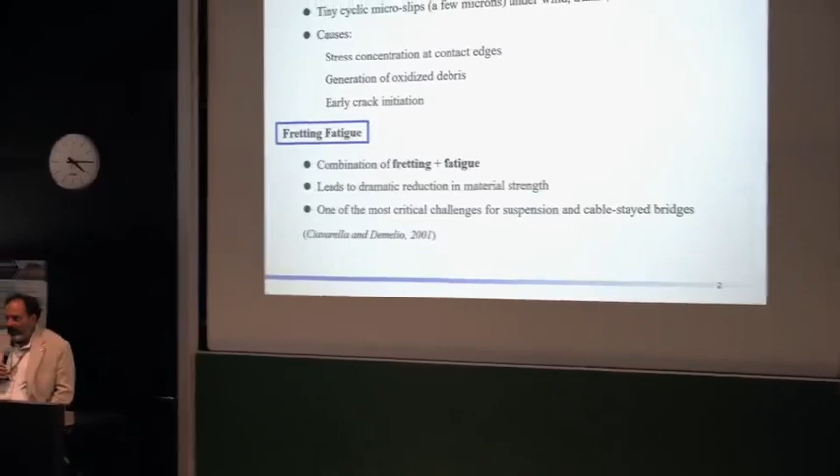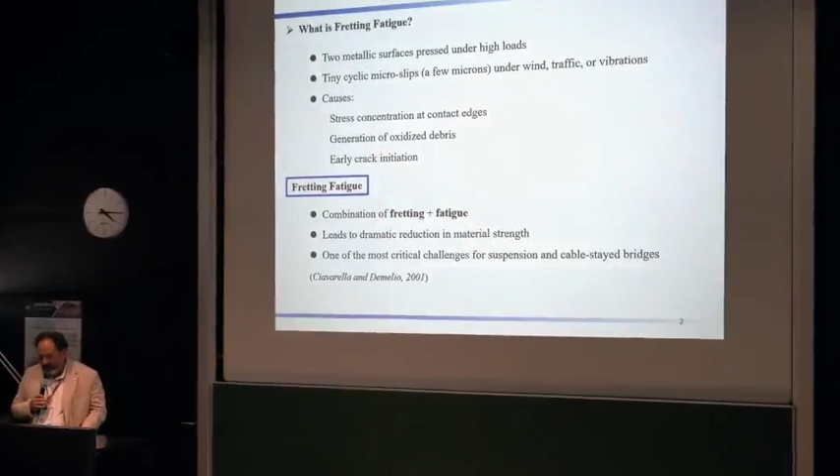I'm not an expert in everything, so I'm only looking at the possible effect of fretting fatigue in the cables, between the cables and where they lie on top of the towers. Fretting fatigue is a special type of fatigue when two surfaces are pressed together under high loads, causing micro slips that lead to stress concentration, debris, and a faster initiation of cracks. So it's a combination of fretting and fatigue.

This topic has never been understood very well. It was the topic of my PhD in Oxford, where they have studied this since the 1960s, and I can tell you that the topic is still not understood. It leads to a dramatic reduction in metal strength, and it's one of the most critical challenges in suspension bridges.

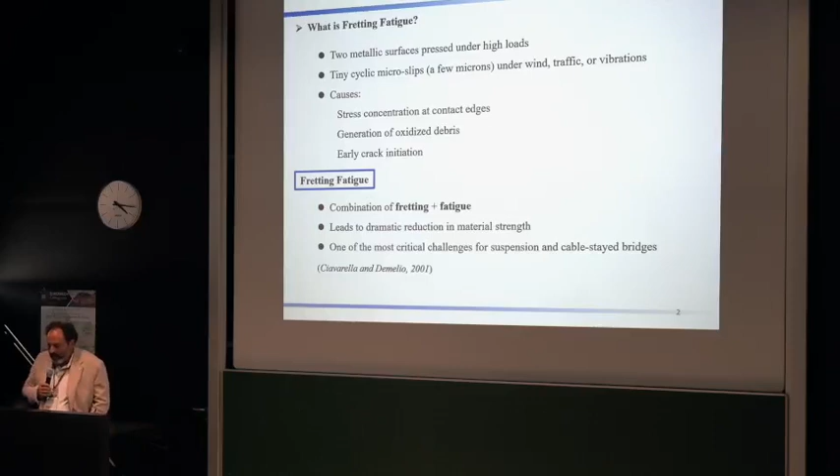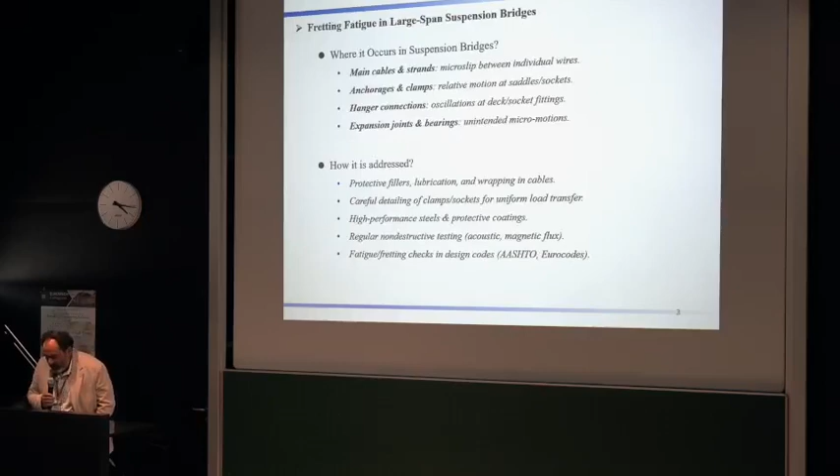So where exactly it occurs in bridges is in the cables, in the strands, but also in the anchorages and in the connections, in the joints. How you can address this, to go straight to the point.

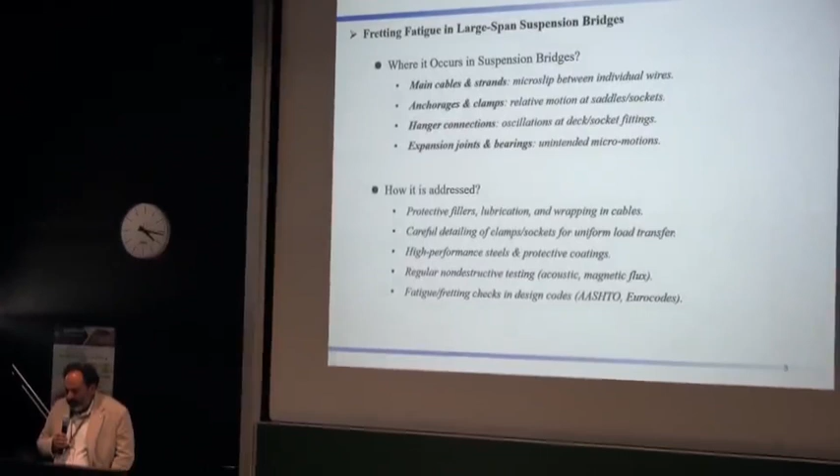You can do protective fillers, lubrication, wrapping in the cables. You can try some tricks for more uniform load transfer. You can do protective coatings, and you can do regular non-destructive testing to check that nothing is going wrong. Of course, you can also design somehow.

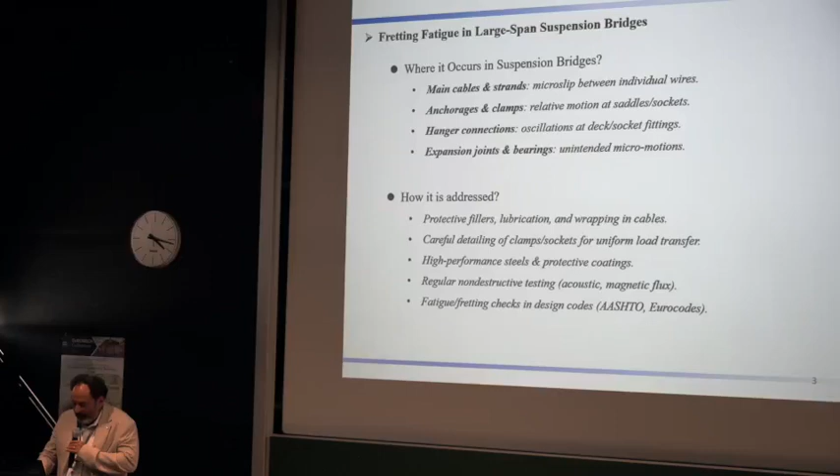You can use codes, and now this is more delicate and difficult to explain. So this was a topic of interest in any bridge.

One of the main and biggest improvements in understanding fretting fatigue was the MIT crack analog, suggested by Giannakopoulos and Suresh. Around the same time as my PhD, they were working with the US Air Force on fretting fatigue together with Rob Ritchie, Tom Farris, and other people in the US. They suggested a very simple model, proposing that the contact, apart from details of the geometry and apart from the micro slip, is not very far from a crack.

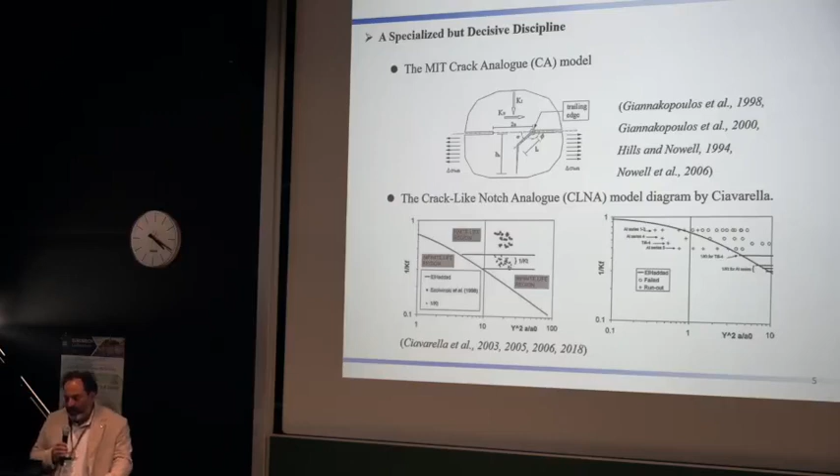Here you can see some diagrams where I collapsed all the known data of fretting fatigue. There is, of course, one fitting parameter in this model, which is a ratio depending on fatigue threshold and fatigue limit - of the order of intrinsic cracks in fatigue.

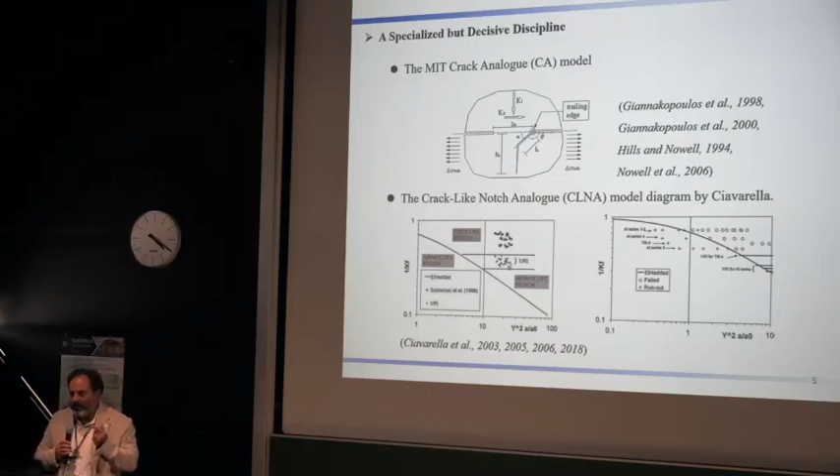So it's of the order for metals of 100 microns. But except for this parameter, which is reasonable because we can estimate it from fatigue experiments, the model fits all the data quite well for infinite life.

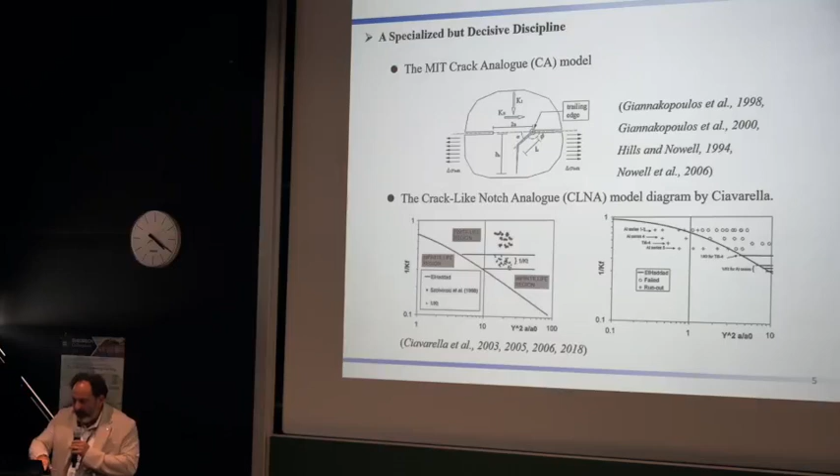So in design, we can apply many different types of approaches. One is to apply knockdown factors, to consider that fretting fatigue is more serious than fatigue, but we should also consider that there are scale effects.

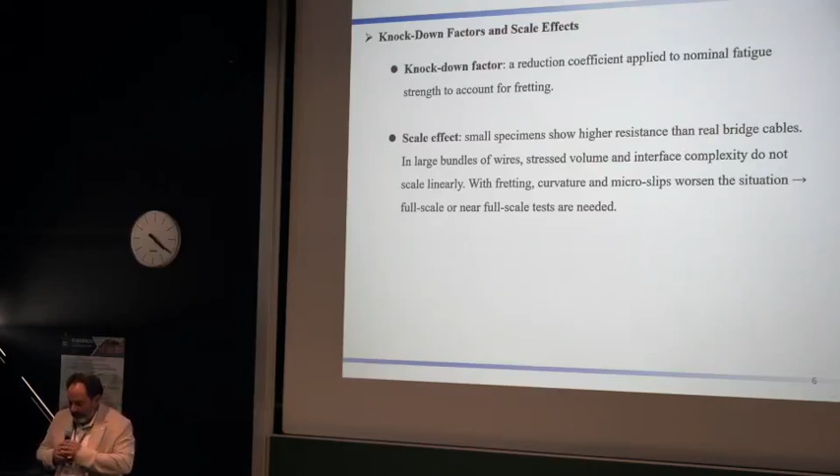I spoke to Professor Bazant, and he told me that in the case of wires, we should have better behavior for bigger wires than for smaller wires. This is very interesting to me because normally the opposite is true - for bigger specimens, you have weaker strength. So I will be interested to ask him his opinion, which of course I believe.

And so in general, in the past, we didn't always design with codes. If we think of the Roman Pantheon in Rome, you know very well that it has survived 2,000 years, and it was never designed. There was no stress analysis, no Cauchy, no Navier, no bending theory. The Romans didn't have any model.

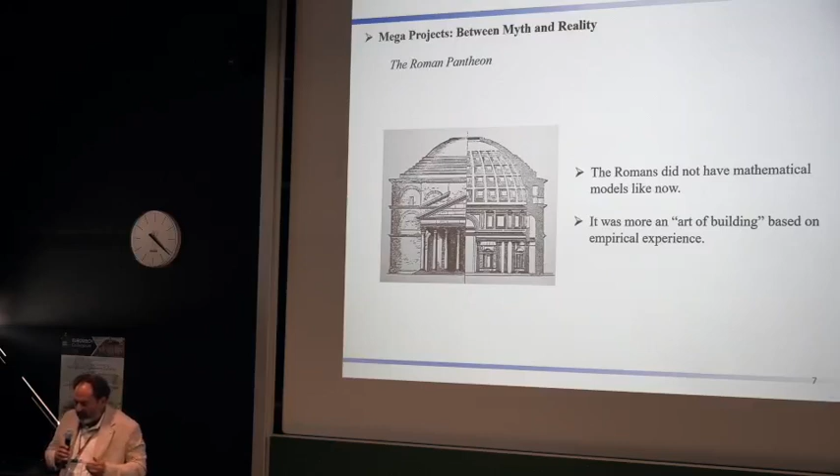They had some empirical understanding of cement, which is very interesting, and it is still not understood exactly how they built the structure. If you have better ideas, maybe we can discuss.

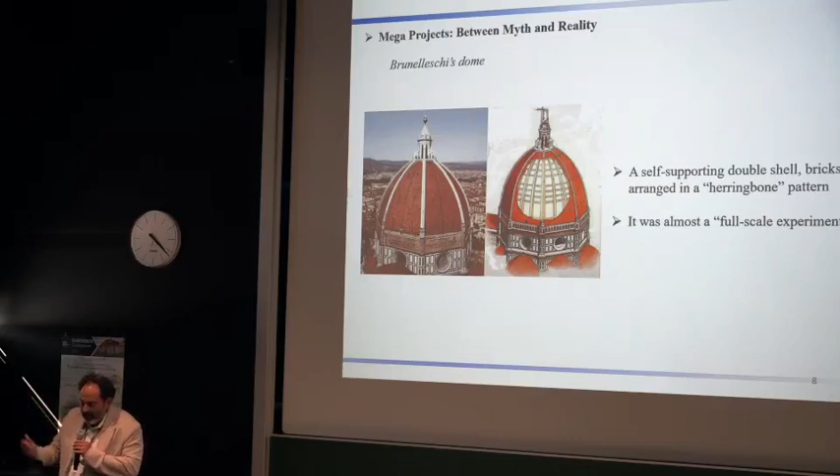There is the Brunelleschi dome, also a very huge progress. Again, there was no real calculation, but it was Brunelleschi who understood how to build the dome in a certain herringbone pattern, and the dome is still there in Florence. So this is the monument of the Renaissance, like the Pantheon is the monument of the Roman Empire.

There is the Eiffel Tower, moving a little bit further, and this is a monument of calculation, because Eiffel was a very brave engineer and he applied almost modern methods. There was some controversy, mostly about the aesthetical value of the tower. Maupassant and Flaubert were not very happy about the tower, but if you have been to Paris, you probably know that the tower is still there.

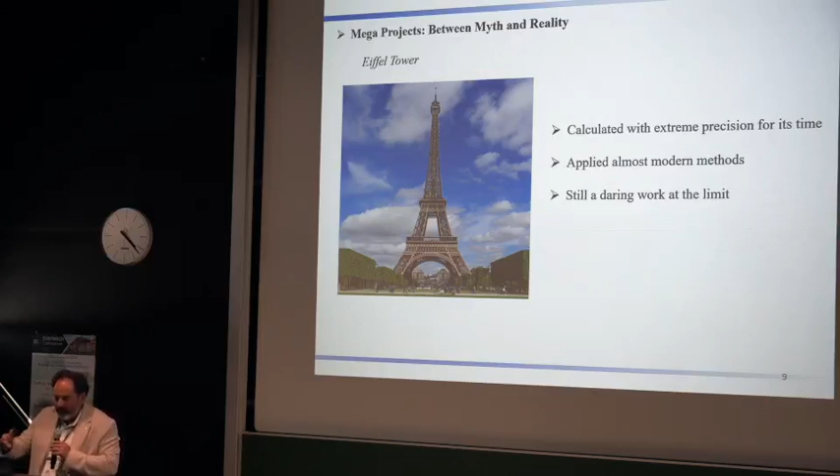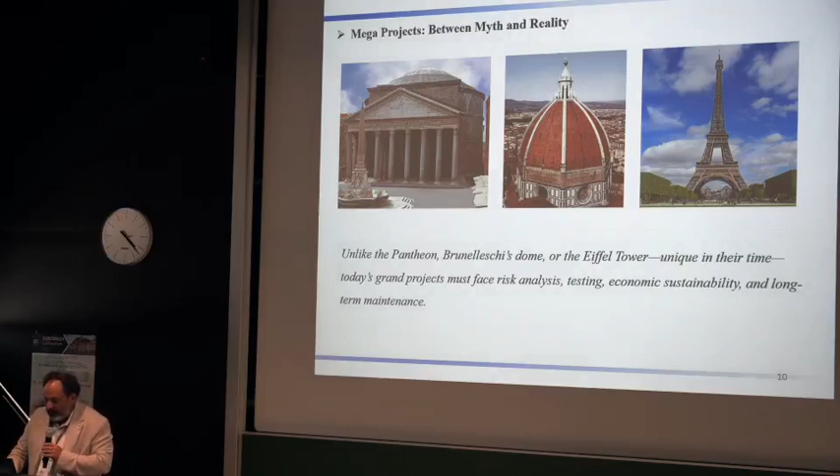So these three examples mean that not necessarily do we need to design structures in advance, and not necessarily do we understand in advance how long the structure will last.

But the Messina Strait crossing, as I said, was proposed many times since ancient Rome, and it was never built. I don't want to go into details of the proposals. It is a 3,300 meter bridge in an area where there is a possibility of earthquakes, movement of the plates, and strong wind. So it's a real big challenge.

People have studied this problem for more than 30 years, and there was a lot of funding, especially in Italy. I don't know why, but this funding is only concentrated in Italy, and they addressed many problems. I don't want to say that they didn't care about fatigue.

Now there is a discussion, of course, in the newspapers. There are many contributions from engineers, from geotechnics, and not everybody is convinced that the bridge can be built. They also changed the structure, the solution.

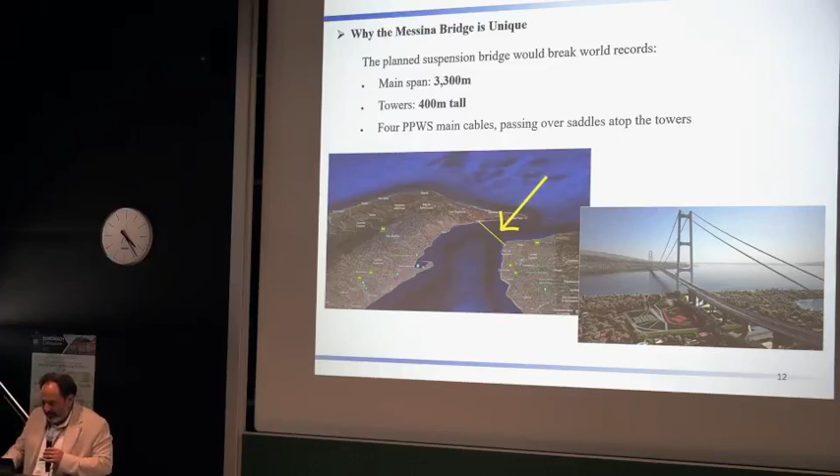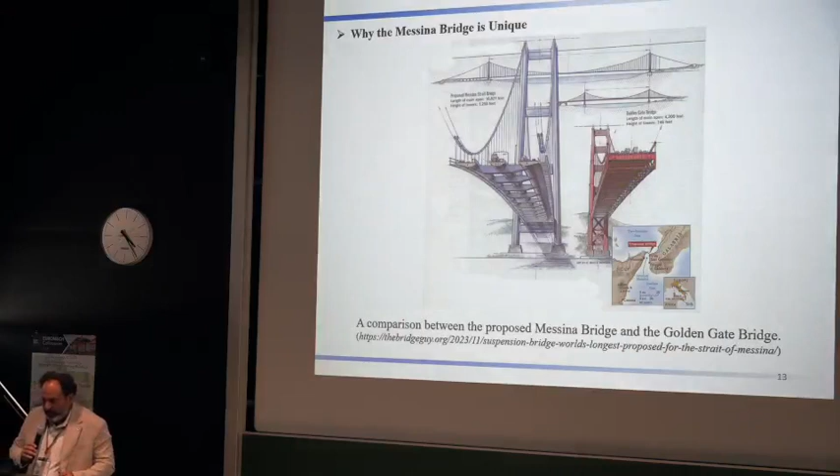Now there are 4 main cables passing over these saddles, and the towers are 400 meters tall, so it's not very easy to do the maintenance either. Just to have an idea of the dimension of the bridge, here there is a comparison with the Golden Gate. It's a big step forward.

So what are these cables? They consist of tens of thousands of parallel aligned high-strength steel wires, each individually galvanized, which are either air-spun in place from individual wires or using prefabricated bundles of groups of parallel wires. This system is called prefabricated parallel wire strands, PPWS. The final assembly is then compacted into a dense sealed bundle.

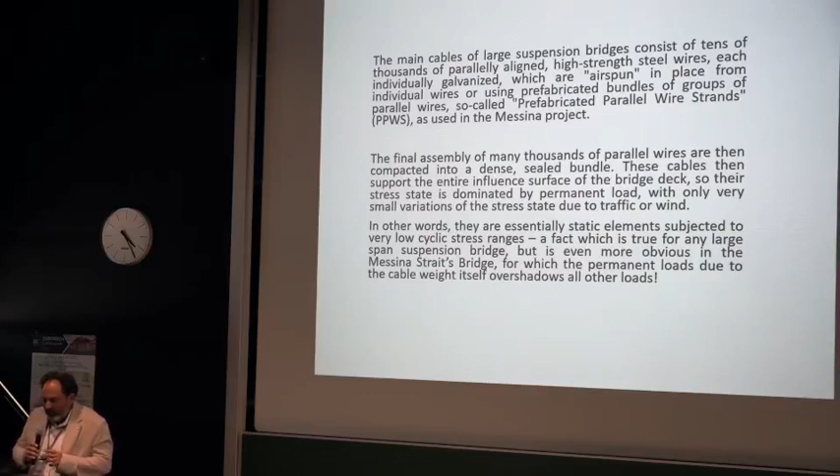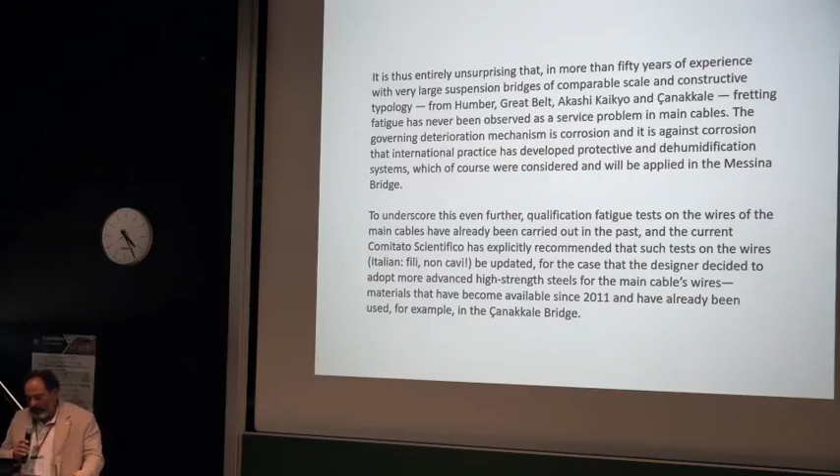These cables then support the deck, and the new solution is that they are opened again and pass over the saddle. Now, this slide is not correct - it is not true that fretting fatigue has never been observed. It contradicts other information, so there is a mistake, sorry.

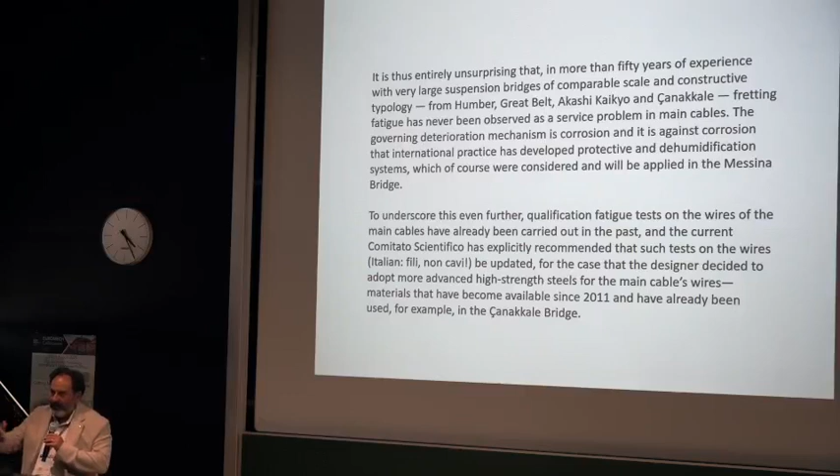There is a committee in Italy trying to suggest improvements in the design. They have suggested 67 improvements, and now there is a design that is called final, but the real executive design will be in 2 years. So they are starting to build the bridge before the final design is approved, which is a little bit interesting.

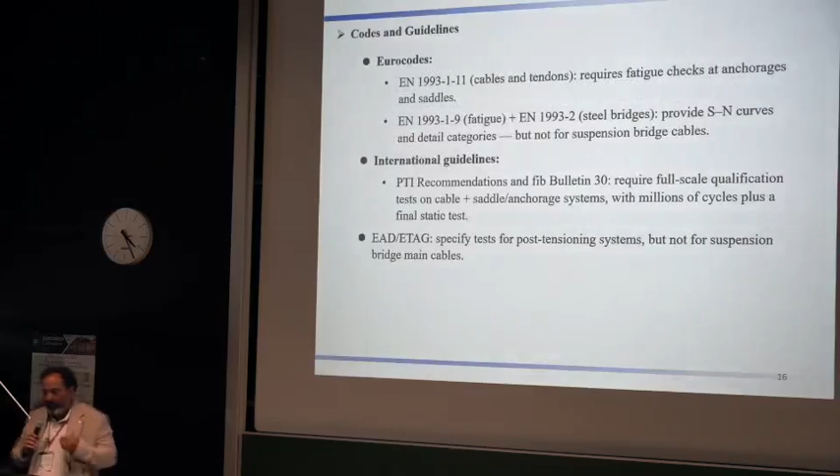Again, in terms of codes, by the law we need to stick to the Eurocodes. The Eurocodes have some static rules and also some fatigue rules. They don't really take into account fretting fatigue because it's too specialistic. For fatigue, they have some special SN curves for every detail, so we can design for this. And these Eurocodes don't require full-scale testing.

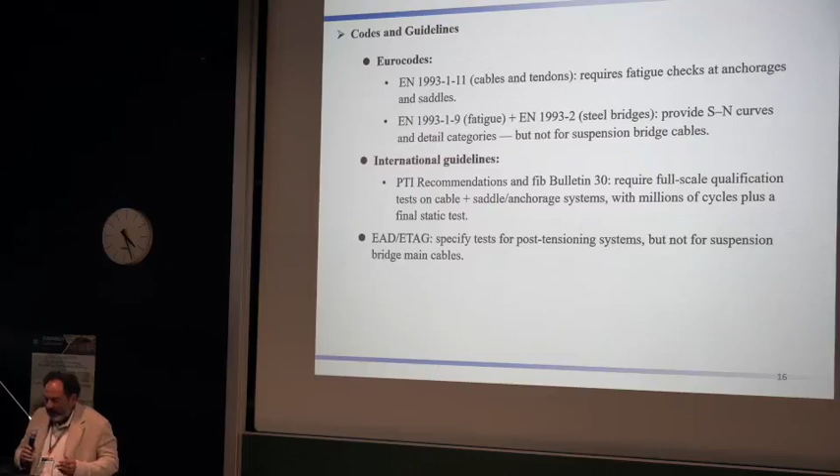If we look at international guidelines like PTI and FIB Bulletin 30, they suggest - this is not by law - full-scale qualification on the cables with millions of cycles. Of course, we cannot do this on the bridge of Messina.

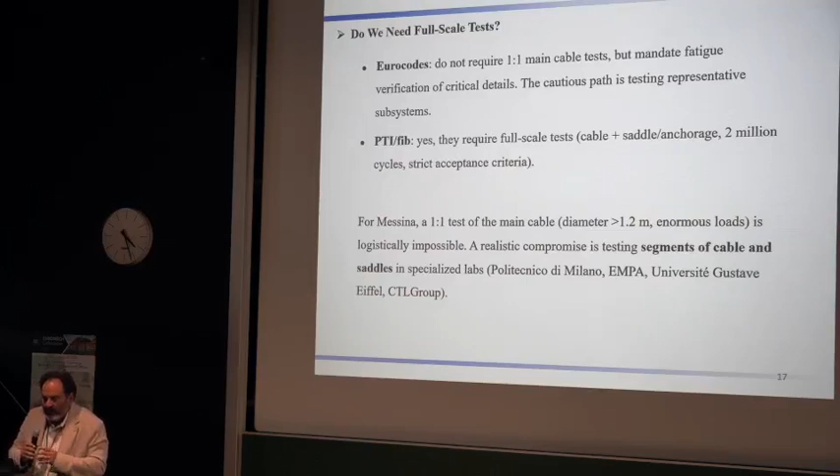So again, there is a discussion in the newspapers about whether we should do full-scale testing, and again, it's not possible. So we should maybe do some testing of segments of cables, and this has not been done. All of this should be done in these next 2 years, which is not easy to do, as you can imagine.

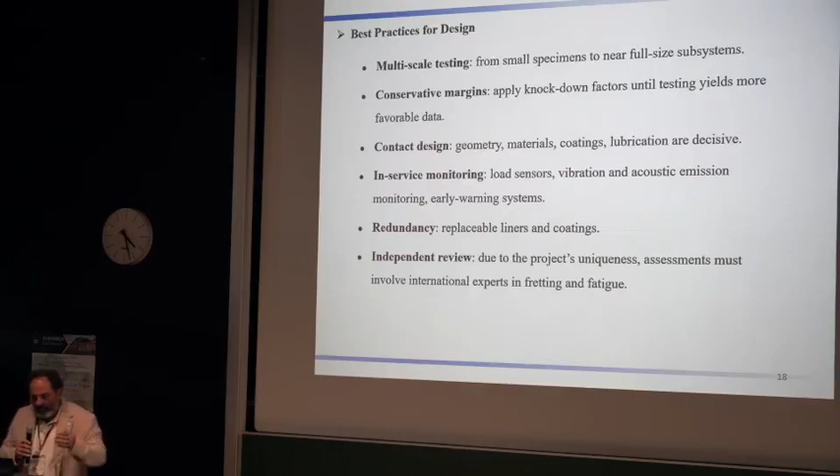So the best practice for design that I recommend is multi-scale testing. You start from small specimens and go to near full-size subsystems. You should take conservative margins, applying knockdown factors until testing yields more favorable data. You can improve the contact design, the geometry, the materials, the coatings, the lubrication, which are very important. And you should do in-service monitoring. You can also do redundant systems.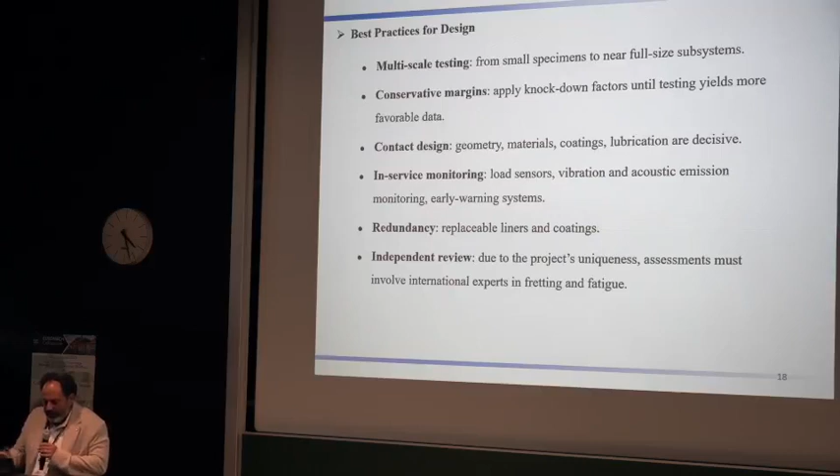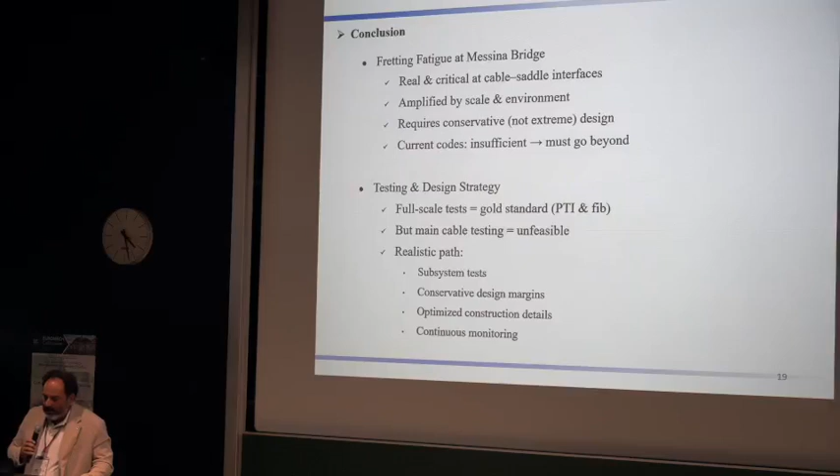And independent review. So in conclusion, I think this is one topic that really worries me - the problem of fretting fatigue in the bridge - and it requires further design. I hope I will give you more information in the next 2 years. Thank you.